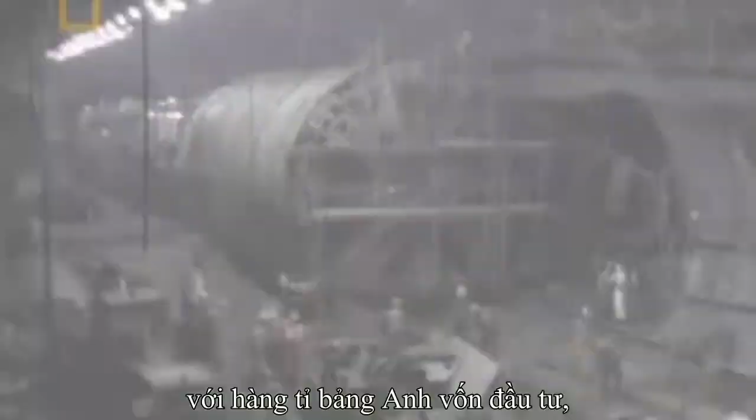Two countries divided by centuries of rivalry and warfare, and by 34 kilometers of treacherous open sea. It was a radical idea to dig a tunnel connecting them 100 meters below the rocky seabed. At stake, billions of pounds and the lives of 8,000 tunnellers. If it worked, it would be the world's longest undersea tunnel.

But with terrifying floods, a horrific fire, and financial meltdown, the Channel Tunnel would dice with disaster right from the start. This train is making an extraordinary journey that will take it under the surface of the Earth, through one of the world's biggest man-made structures. Engineers call it one of the 7 wonders of the modern world. The Channel Tunnel took 7 years to construct and devoured 1 million tons of concrete, enough to build the Empire State Building 3 times over.

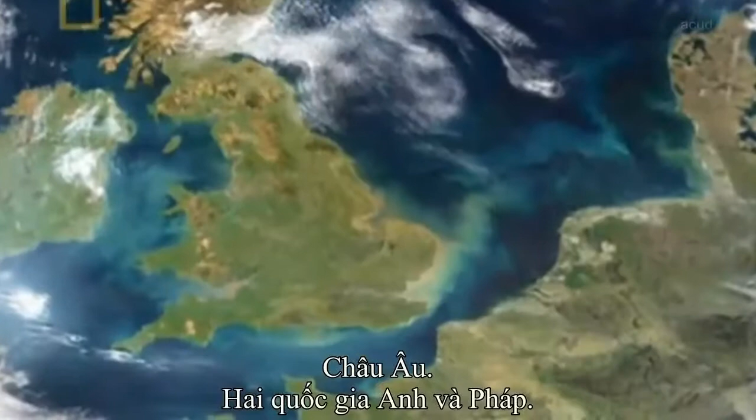Europe, the nations of Britain and France. Since Ice Age glaciers melted 13,000 years ago, they've been separated by this formidable body of water, the English Channel. At 34 kilometers across, it's twice as wide as the Grand Canyon. The two nations spent hundreds of years at war, right up to the last century. For many on both sides, it's still a love-hate relationship. So the idea of an undersea tunnel to link these one-time foes caused controversy. But the massive trade boost for both countries was an irresistible incentive.

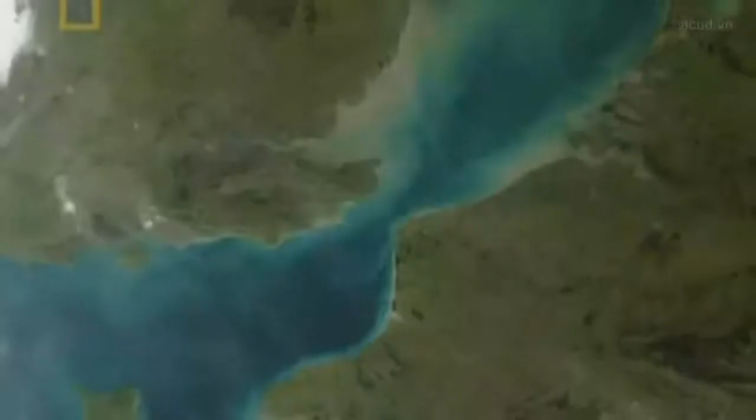In 1986, British Premier Thatcher and French Premier Mitterrand agreed to build the Channel Tunnel. But the total £3 billion budget was put up entirely by private finance. December 1987. The big dig begins. Heading underground were 2 armies of excavators, each over 4,000 strong, 1 French and 1 British. Each team would dig out from its own shoreline, racing to be the first to the midway point under the channel.

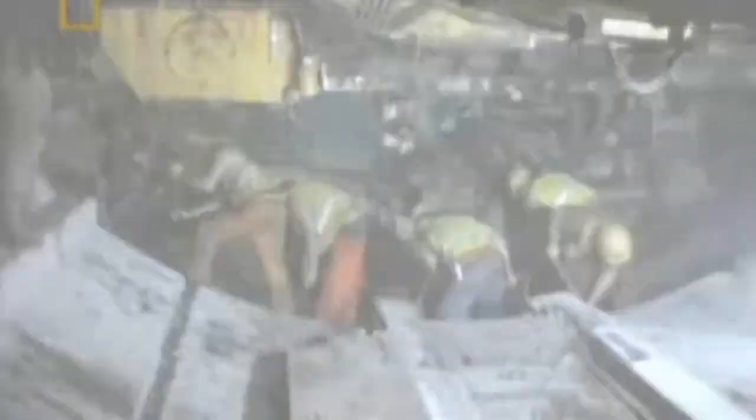The Brits were a tunnelling elite drawn from major worldwide underground projects. Calling themselves the Tunnel Tigers, they set great store by teamwork. One-man armies don't go very far. You know, it takes quite a few lads to keep something like this going. Commanding them is Chief Engineer Gordon Crichton. You had a team who were totally dedicated to building the job.

The French digging team were the underdogs, locally recruited and trained up for the project. It's the first time any of us have done a job like this. Everyone's proud to be involved. Leading the French troops was Laurent Leblanc. I couldn't believe I was actually working on such an exciting and colossal project. For me, it was absolutely incredible.

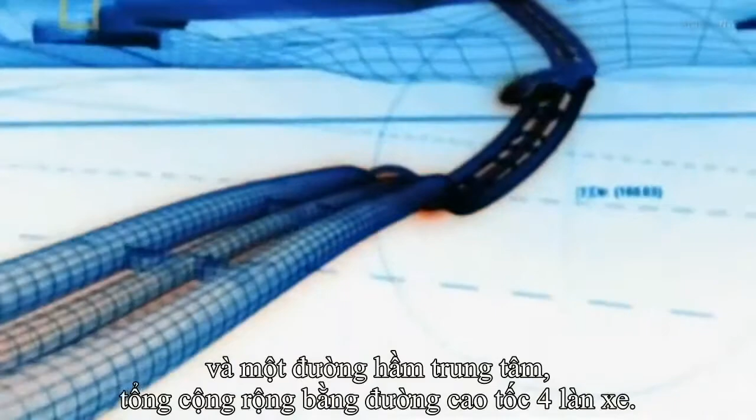The Channel Tunnel would run twice as long underwater as any previous tunnel. The task facing the teams was huge. They had to dig 2 main rail tunnels, plus a central service tunnel, together as wide as a 4-lane motorway. 245 cross passages, crucial escape routes in the nightmare scenario of a fire or accident in the tunnel. Above the tunnels, vents to release the huge air pressure from speeding trains. And giant crossover caverns, allowing trains to divert from one tunnel to the other to allow for maintenance. It all added up to a staggering 153 kilometers of tunnel to be dug.

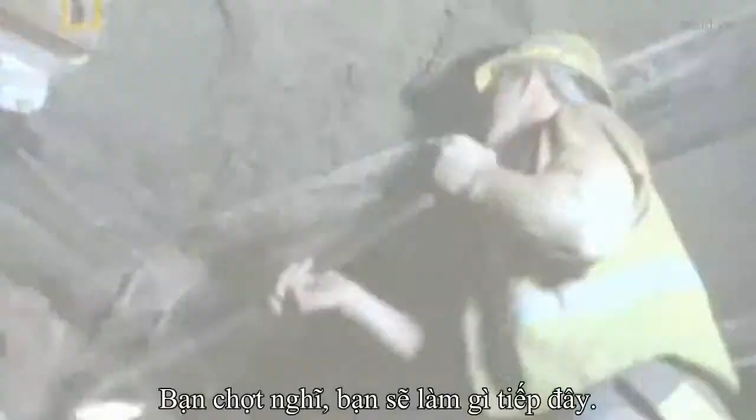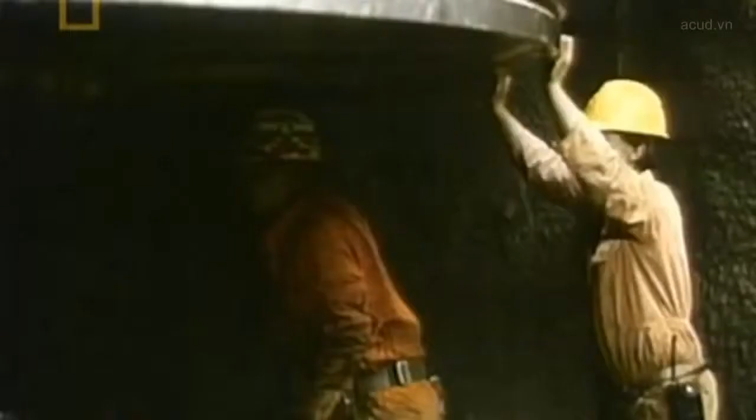As the dig began, the tunnellers were conscious of the vast scale and the real dangers of the task ahead. Above their heads, 100 metres of seawater and rocky seabed. Every day you wonder what you're going into. There's only one way in and one way out. Noisy, hot. You just think, what have I got myself in for, really? Ahead of these tunnelling foot soldiers stood a 17 million-ton wall of earth and rock. It's not a job for claustrophobics. The job would push the men to the limit, but it would also make big demands on the technology of the day.

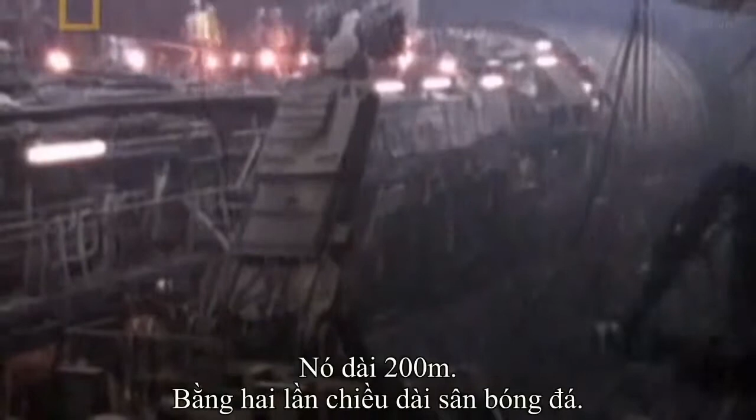Meet the tunnel boring machines. These underground leviathans spearheaded the Channel Tunnel dig. They were 200 metres long. That's the length of 2 football fields. They weighed 1,100 tonnes apiece, as much as a World War II destroyer. And they were twice as wide as a tank.

Yet, as Gordon Crichton reveals, the way that TBMs work is surprisingly simple. Imagine this is the bed of the channel. The machine is rotating underneath the sea, and as it rotates, the spoil from the tunnel is taken out the back, put into railway wagons and carried to the surface for disposal. Also, as it rotates, it erects a lining, a support round it, which is the permanent lining.

Expert tunneller Brendan Riley knew how central the TBMs were to the dig. Basically, the machine is a mini factory. The factory is provided with power, it's provided with water, it's provided with electric. It's a workshop of the machine, preventive repairs. Basically, it's self-contained. It's got everything. 12 French and British TBMs excavated the tunnels 24 hours a day, 7 days a week.

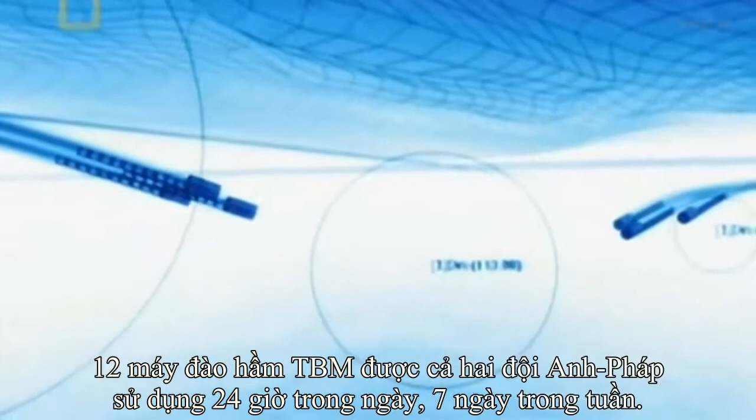The TBM's high-tensile forged steel blades carved out 10 tons of rock with every turn. The biggest machines cost £10 million each, but as they've been specially designed for this one job, at the end they would simply be scrapped.

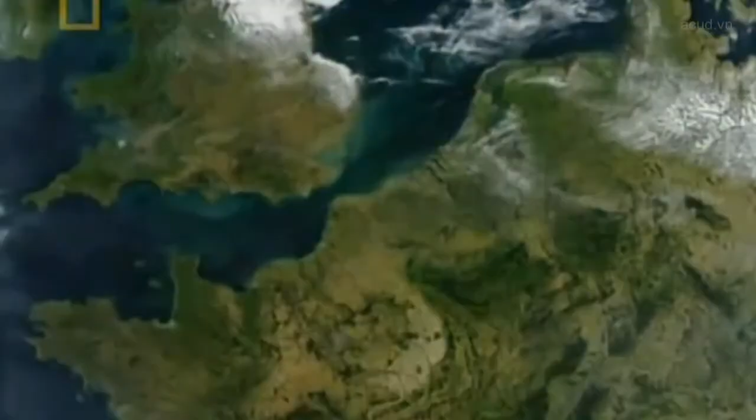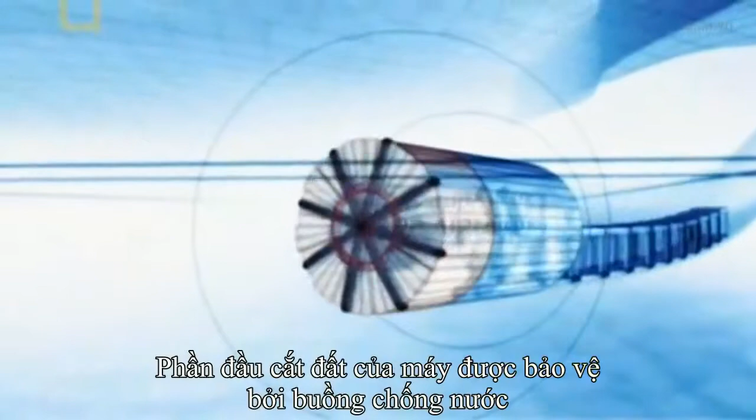The race between French and British tunnellers would be won or lost by their TBM's rate of progress. The Brits had the fastest machines, devouring up to 75 metres and 36,000 tonnes of rock a day. The French machines were 25% slower, but did have a key advantage. Their cutting heads were protected by a waterproof housing that allowed them to work on safely, even through waterlogged soil.

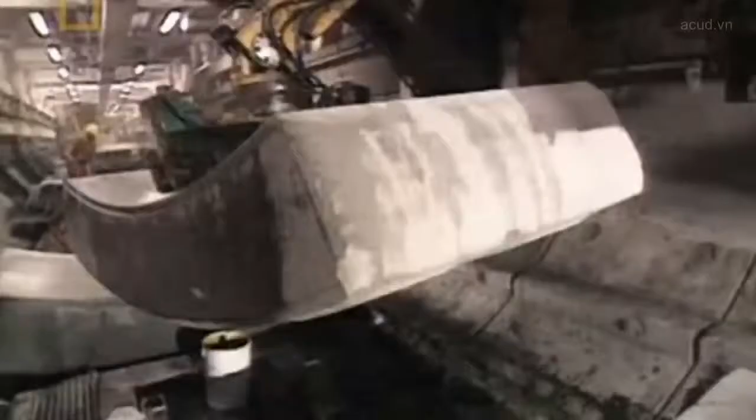1 month into the tunnel dig, with the ground staying dry, the speedier British TBMs began to get ahead. Every day, hundreds of concrete slabs were shipped in to line the tunnel roof as it was dug. They were as big as a family car and 3 times as heavy.

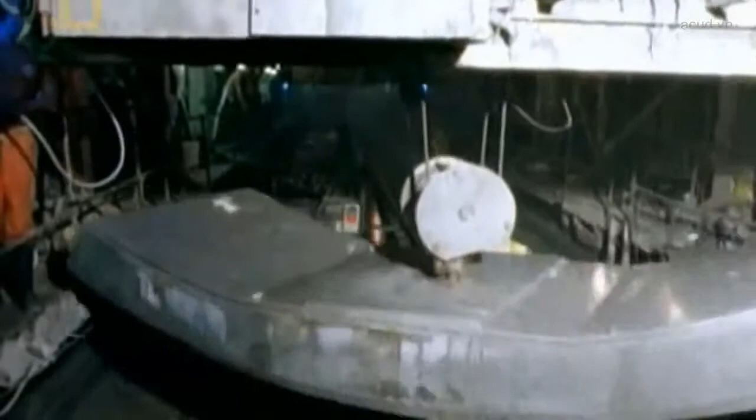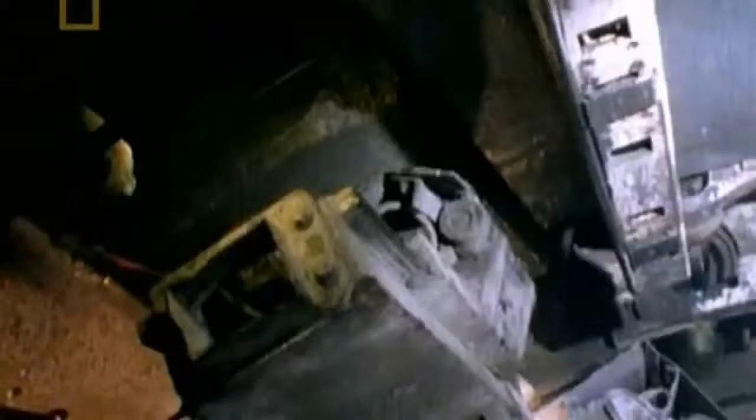This is no ordinary concrete. Specially made to a recipe using granite, it's stronger than the stuff they use to build nuclear reactors. The TBM's powerful hydraulic arms pushed the slabs into place, forming the tunnel wall. The TBMs had to be kept supplied with slabs and constantly moving forward.

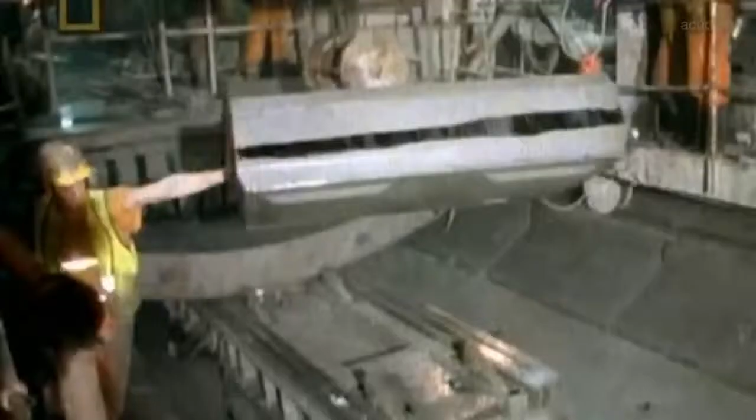British Chief Engineer Crichton knew that the schedule was tight. And with the tunnel's £1.3 billion budget all put up by private finance, government bailout was not an option. With the dig costing £1 million a day, each hour's overrun would add £40,000. By January 1987, the Anglo-French tunnelling race was hotting up. But the Brits were holding on to their lead.

The rivalry underground is keeping the dig on schedule, but speed isn't everything. Success relies on keeping both tunnels precisely on target. If they stray off course, lives could be at risk. It's enough to daunt the boldest of engineers. The Channel Tunnel Project, the longest undersea tunnel in the world.

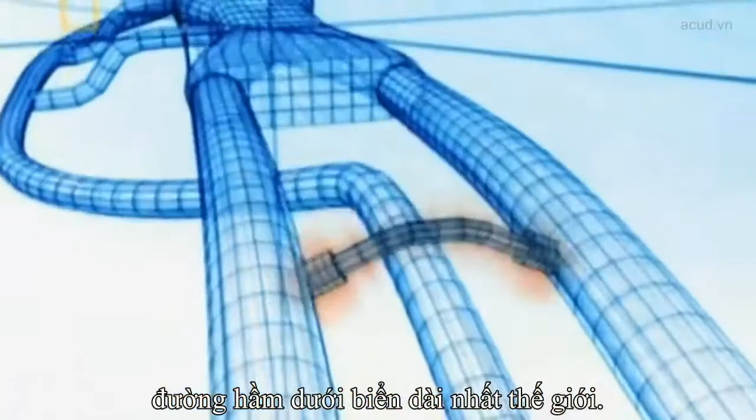Two rival teams of French and British workers were each digging out from their own shoreline. The plan, to meet midway under the English Channel. The tunnellers' goal was to win the race for the midpoint. But what kept the engineers awake at night was much more fundamental. The fear that the two tunnels wouldn't meet up.

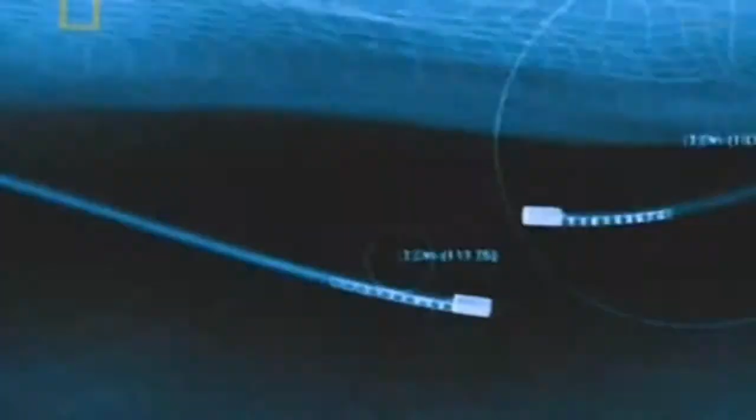If the two tunnels missed each other, that would mean last-minute course corrections, which could create sharp bends. And the high-speed trains that would use the tunnel had to have a broadly straight course to operate safely. The margin for error was frighteningly slim. The tunnels could not deviate by more than 2.5 meters. Being off target was not an option.

But lives were at stake too. If the massive tunnel-boring machines strayed off course, they could hit waterlogged ground. The result could be disastrous. Flooding, or worse, tunnel collapse. It was imperative that the TBMs were guided along a safe and accurate route. That meant conducting one of the world's longest and most in-depth underground surveys.

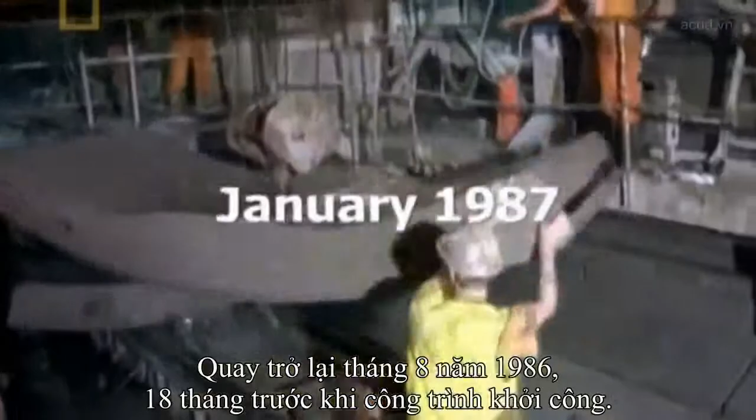Rewind to August 1986, 18 months before tunnelling began. When surveyor Eric Radcliffe took on the job of plotting the tunnel's course, he knew the scale of the challenge he faced. France you can see over there, that's the French coast. So we had all that way to drive the tunnel and keep it online for that 38 kilometres. Actually, from here it doesn't look too bad, but it's a long, long way.

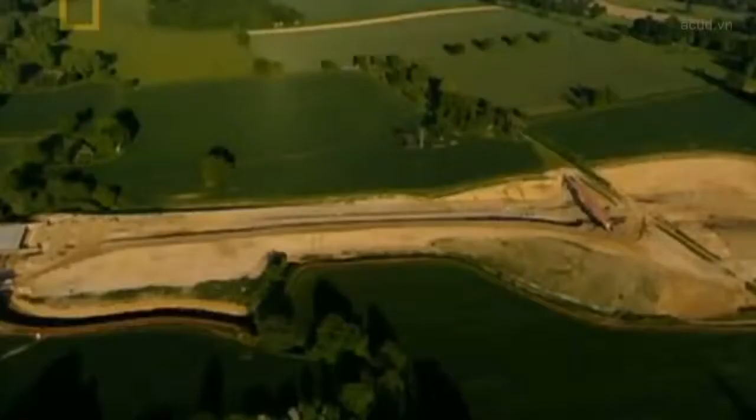Plotting an accurate course over such a long distance underground is a surveyor's nightmare. In tunnels, the normal rules of surveying don't apply. Surveyors normally work by measuring a series of angles at control points along the route. It's all a matter of geometry. Above ground, with 360-degree visibility, plotting a course is relatively simple.

Eric Radcliffe explains the difference. The whole road is opened to the air. All the survey control points from which you do the setting out are already established over the whole length. Underground, there are obvious complications. All the surveyors can see is a wall of rock. They can't see ahead to plot the course.

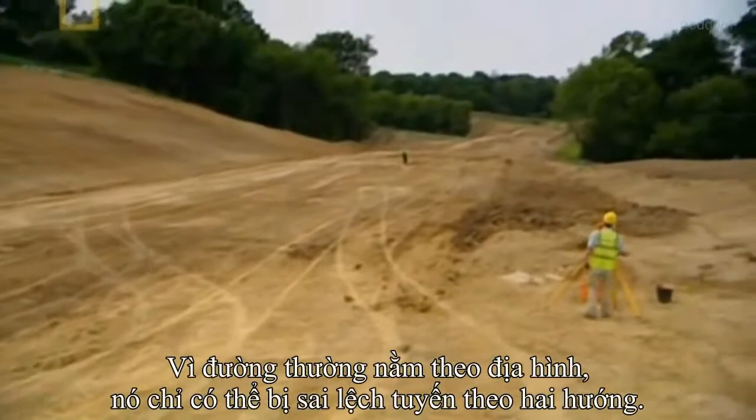Roads have one other plus point over tunnels. Because they're flat strips on the landscape, they can only go off course in two directions. Left or right.

A tunnel occupies a three-dimensional space underground. It can go off course not only left or right, but also up or down. The two halves of the Channel Tunnel had 4 potential ways to miss meeting up. It's like asking a golfer to sink a hole-in-one blindfolded from 38 kilometers. To keep the tunnel on course and on target, the surveyors had to use a secret weapon: geology.

Along its underground route, the tunnel would be driven through a layer cake of different soil and rock types with very different consistencies. The geologists needed one stratum that went right across the channel. This stratum would provide a trail to help keep the British and the French tunnellers on course. But it must be exactly the right type of rock for tunnelling.

Jean-Luc Dessein was one of the geophysicists charged with tracing the perfect stratum for the tunnel to follow. On the French side of the channel, Dessein began his search. It would have to be waterproof to resist flooding, and compact enough so it wouldn't collapse during the dig. In these cliffs, Dessein found his prize. Water poured over this seam of rock without soaking in, evidence that it was waterproof. The soft rock, impervious, so no water in the tunnel. This is a perfect situation for boring a tunnel. It's called blue chalk.

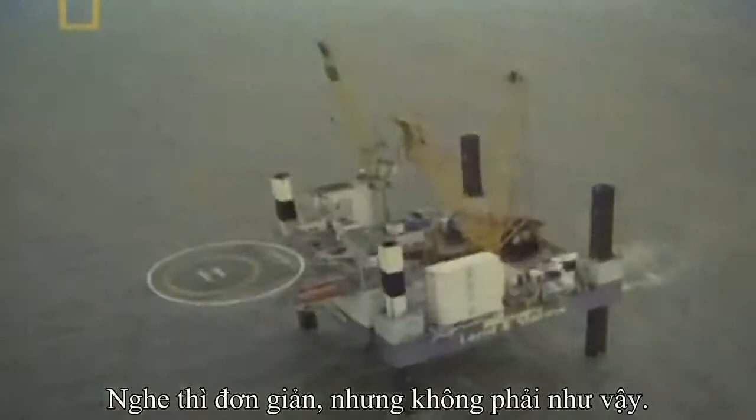But it was one thing to identify the ideal rock, another to discover its course. Geologists drilled a series of boreholes into the seabed and dropped probes that fired sound waves deep underground. The aim, to measure changes of speed in the sound waves as they passed through different rock and soil layers. It sounds straightforward, but it wasn't. Tracing the course of the blue chalk meant sinking 12 of these boreholes right across the channel, a tricky task in one of the world's busiest sea lanes.

You have a high traffic of vessels. You have tide, you have waves, so it's a difficult place for making accurate investigations. The geologists concluded the blue chalk would provide a feasible route across the channel. If they were wrong and the TBMs left the waterproof strata, they could hit waterlogged ground, with devastating consequences, flooding or even tunnel collapse.

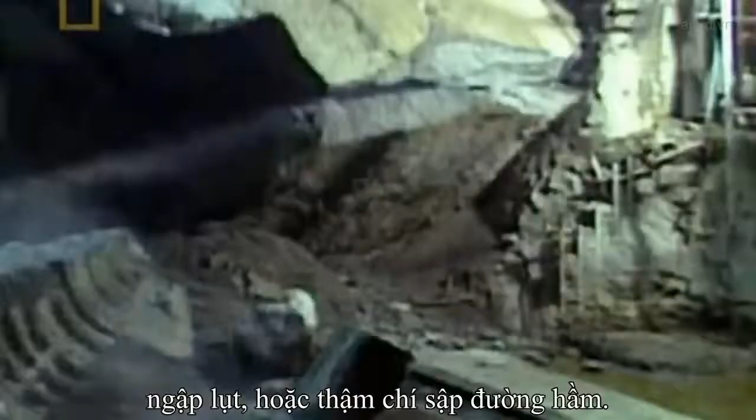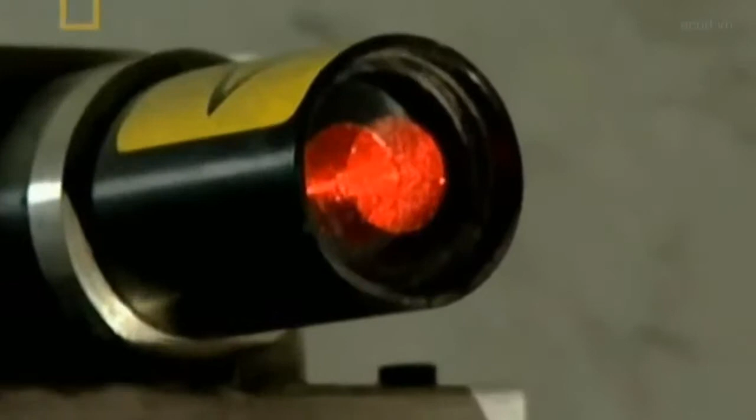Spring 1988, 3 months into the Channel Tunnel dig. The tunnellers were gouging their way through the rock deeper and deeper underground. Standing between the tunnellers and the risk of flood was the TBM's laser guidance system. Laser guidance is commonly used to keep above-ground structures like roads on course, but underground it had to be used in a more imaginative way. Instead of looking ahead to see where they were going, the tunnellers looked back to where they'd been. Laser beams continually scanned backwards to the tunnel's start point to compare it with the TBM's changing location. Computers then checked this data against the surveyor's course coordinates.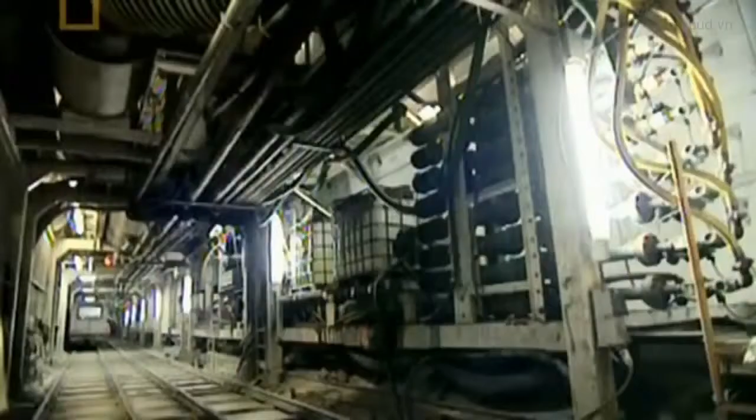For tunneller Brendan Riley, the laser guidance system was one of the TBM's most impressive features. As the machine moves forward, the laser monitors the change in movement to say whether the machine is moving left or right or up or down. With that information fed back into the computer, it compares that information with where the TBM should be at that known point in time and gives that information back to the driver to say whether he needs to steer up or steer right.

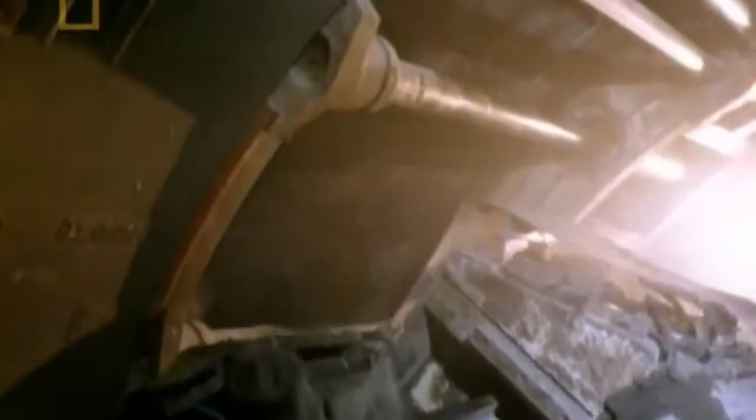As the tunnel face moved further from dry land, conditions for the men got worse. Engineering manager Ian Fugeman recalls the scene. Anybody going to work had to travel in a cramped train up to 22 kilometres out to the place of work. By the end of the dig, the workers' trains had clocked up enough miles to go to the moon and back 4 times.

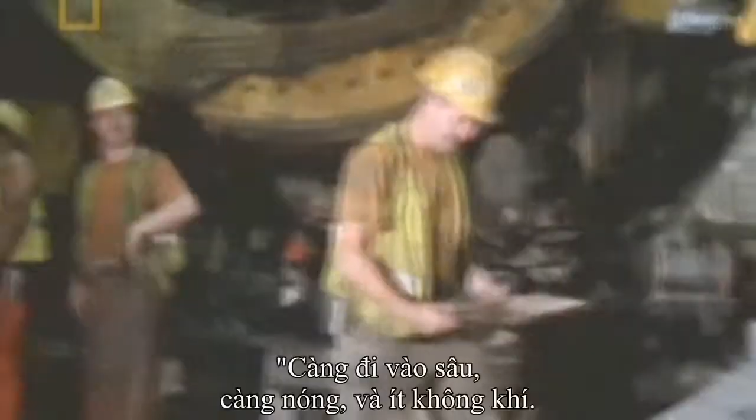This far underground, keeping the air fresh is a major challenge. A massive ventilation system pumped air to the tunnel face. But the men still faced the risk of encountering toxic gases. The further in you are, the warmer it gets, the less air. We carried respirators with us. If there was an accident, we'd have enough air to breathe with.

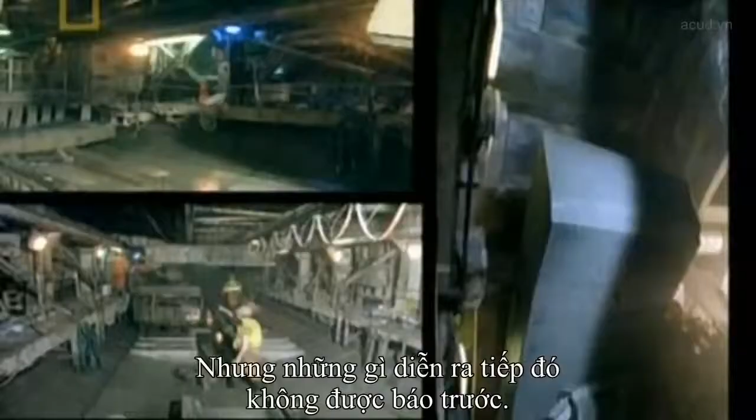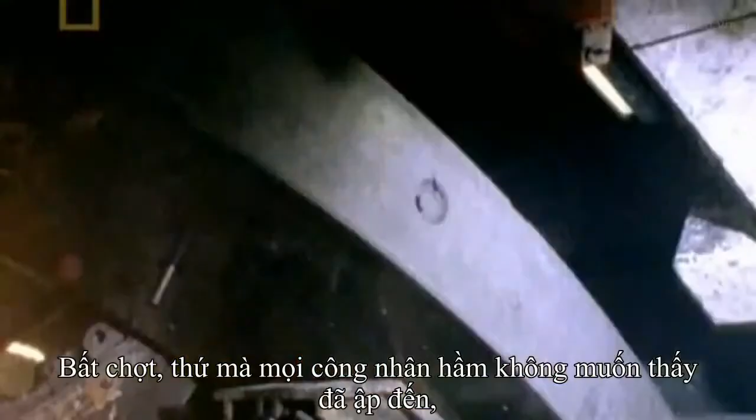But Chief Engineers Gordon Crighton and Laurent Leblanc, the frontline commanders of the tunnel dig, were starting to breathe easier. The schedule was holding up, and so was the layer of blue chalk. But what happened next came without warning. March 1988. The service tunnel on the British side. Suddenly, what no undersea tunneller ever wants to see. Water. Thousands of gallons of it flooding into the tunnel. Work comes to a halt.

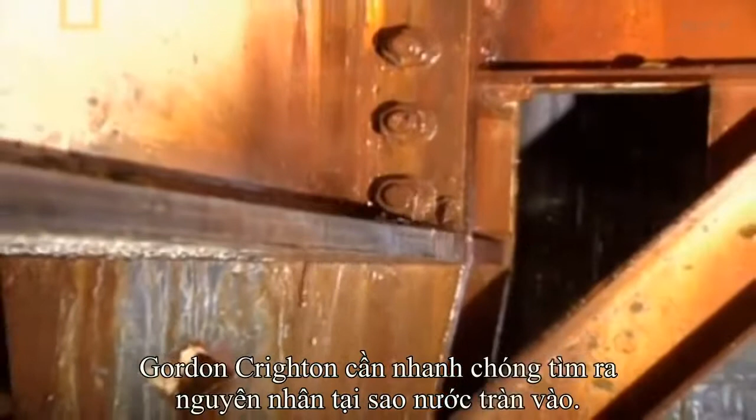Cause panic. Oh, we have to stop straight away because you don't know exactly what you're going into. But Gordon Crighton must act fast to find out where the water is coming from. Is this just a random pocket of fresh water? Or is the sea itself breaking through? He tastes the water, and it's salty. We knew we had a path right to the channel itself. We knew it was serious.

It's disastrous news. What's coming into the tunnel is seawater. The men know that above their heads there's 3,000 billion tons of it. The pressure on the seafloor 50 meters above is enough to crush a car like a beer can. Now, in places, the water starts to burst through with the force of a fire hose, 300 litres a minute.

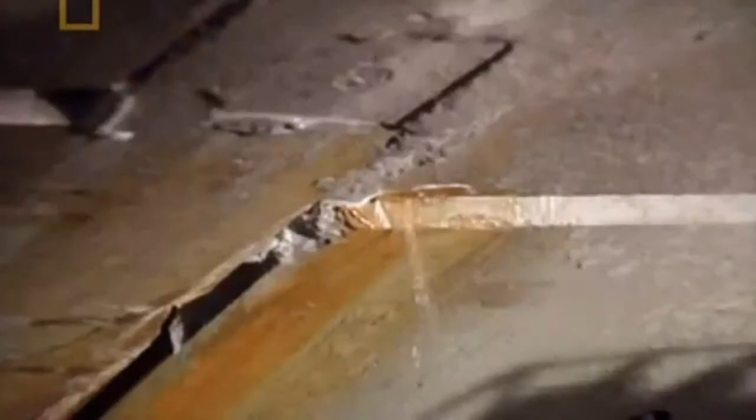Then, a crack appears in the tunnel roof. Rocks start to fall. The water is pouring through fissures and loosening lumps of the tunnel roof. The British tunnellers might just be on the edge of disaster. If the cracks worsen, they might let in enough water to weaken the tunnel. Ultimately, it might even lead to the tunnellers' biggest fear: collapse. Chief Engineer Crighton must find a way to plug the leaks, or they could face catastrophe.

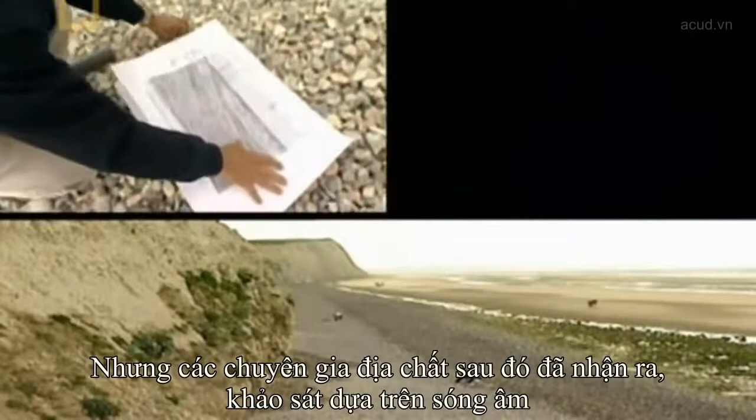But how could this be happening? An 18-month survey identified the special layer of rock called blue chalk that was meant to be waterproof. But the geologists are quick to point out that surveys based on sound waves can reveal the course of a rock layer, but they can't give a definitive picture of the rock's quality. Now it turns out that the stratum of rock the tunnel is driving through is fractured, riddled with fault lines and cracks, something the surveyors could not have foreseen.

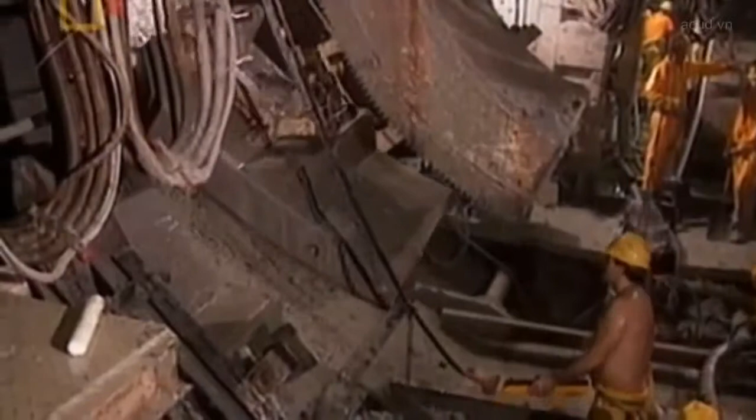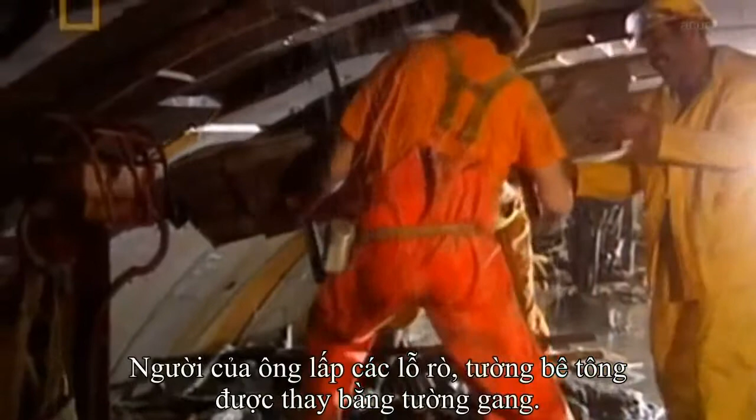Back in the British tunnel, Engineer Crichton averts disaster. The men plug the leaks and concrete liners are replaced by stronger cast iron versions. Crisis over for now. The tunnel tigers start to inch forward again. But the fractured ground stretched on, and the atmosphere was edgy. Every ring that you cut, you were just hoping that it was going to be good ground that was there. But there were more delays as the leaks short-circuited the TBM's electrics. The clock was ticking. With every day, the costs were mounting. And the overspend was running into ten million.

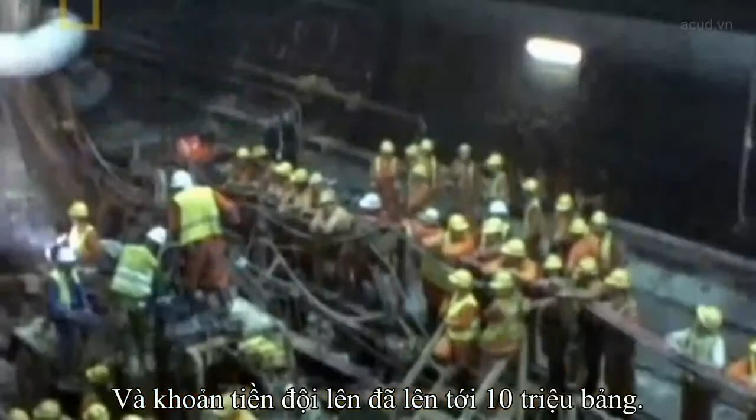The French side, meanwhile, had also hit water. We did indeed hit water. That made the job more difficult. A lot of water always makes the work harder. But the French had been forewarned about fractured rock on their side. Features in the geology made it much simpler to analyse. Now the French decision to opt for waterproof tunnel boring machines finally started to pay off. Slower than the British TBMs so far, they now gave the French a serious edge. We decided to use tunnel boring machines that were totally enclosed, totally watertight. These could resist any level of water leakage, no matter how severe.

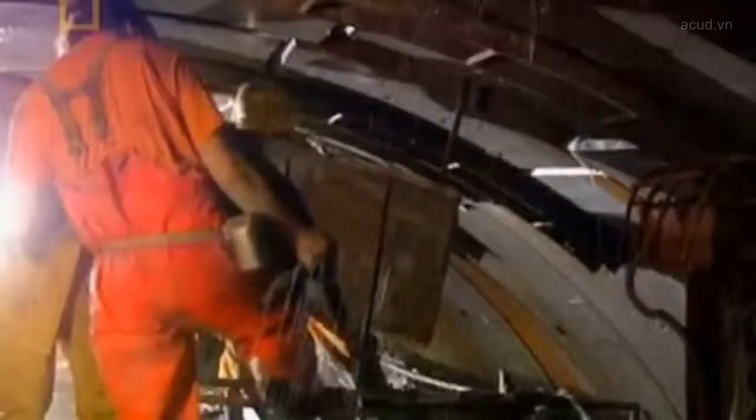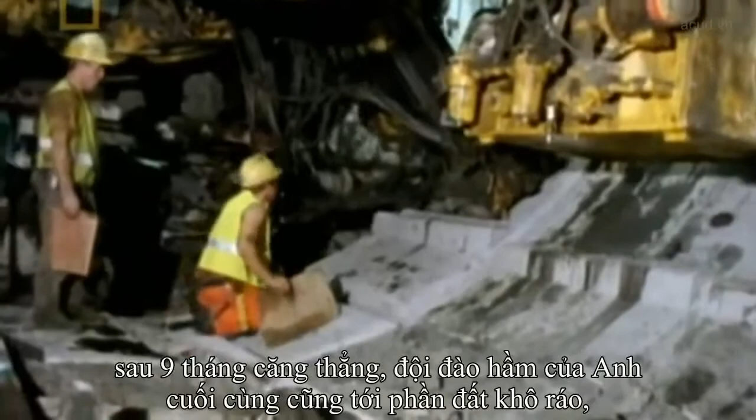Meanwhile, the Brits slogged through the leaks and falling rocks and prayed for better ground. Workers rigged a form of makeshift armour plating on their TBM and pressed on. January 1989. After a tortuous 9 months, the British team finally hit drier ground. Massively behind, the pressure to catch up was now intense. Everybody worked long hours. We had to do it to the time, we had to do it to the programme. But at last, the Tigers were smiling. The ground conditions came right, everything seemed to fall in place, and then we started taking off.

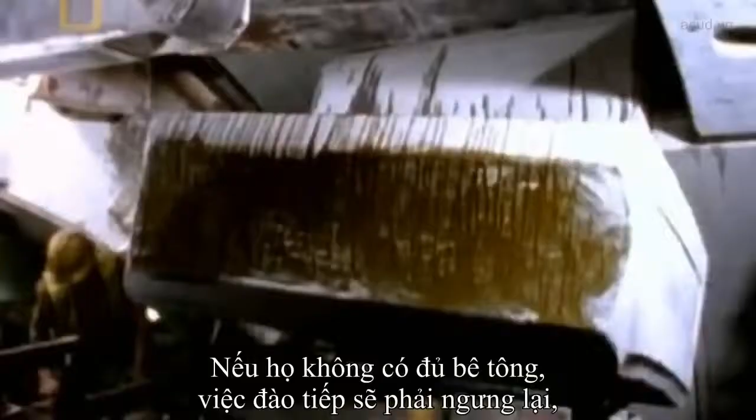The British tunnellers fought their way back into the race. We've done over 400 metres quite a few times in a week, and I personally think we could have done the half kilometre. But success came with a sting. The British progress started to stretch the supply of lining slabs. If the slabs ran out, their dig would grind to a halt, with a multi-million-pound meter ticking.

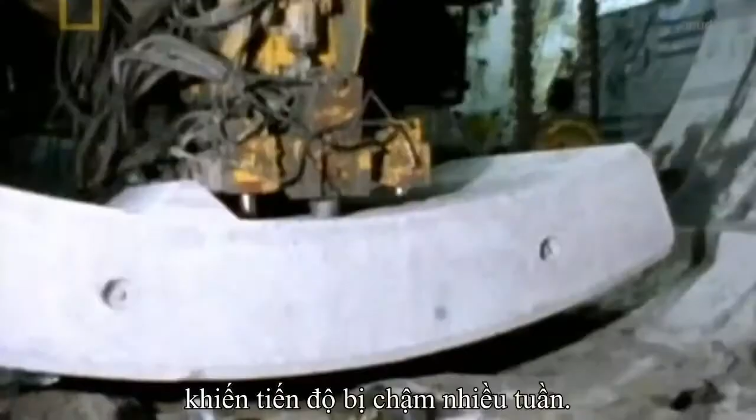January 1990. The French and British tunnelling teams were 2 years into digging the record-breaking Channel Tunnel. The competition between the two countries was fierce as they dug out from their coastlines. If all went to plan, the tunnels would meet up some 18 kilometres out, midway under the English Channel. Flood and rockfalls on the British side nearly spelt disaster and set progress back weeks. But now the Brits were catching up again, and the race for the halfway point was back on with a vengeance. But there's more to building a tunnel than high-speed digging.

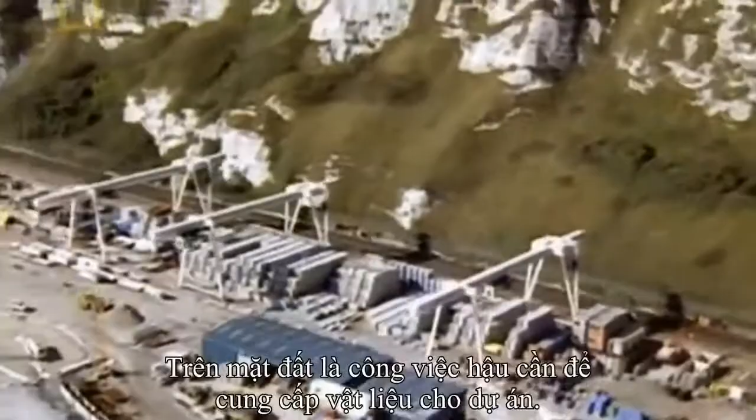Above ground, a huge round-the-clock operation kept the project fed with vital supplies. And the most crucial ingredient of all, concrete. Each slab weighs as much as a pickup truck. The French and the British together need 750,000 of them to line the tunnel. In Britain, special trains carrying 4,500 tons of slabs, enough to construct 100 average houses, speed back and forth to the coast. But the British team was about to hit another problem.

The flat French shoreline provided plenty of room to store slabs close to their tunnel mouth. But 50-metre cliffs on the British side hugely restricted storage space. And as their tunnelling rate increased, space got tighter and tighter. If it ran out altogether, the supply chain would slow, the dig falter, and the mounting overspend could spin out of control. The British TBMs were munching their way through the tunnel, but without slabs to line the roof, they would soon grind to an expensive halt.

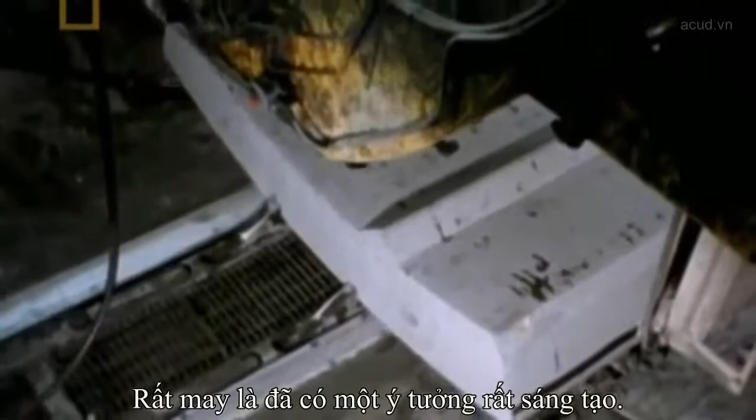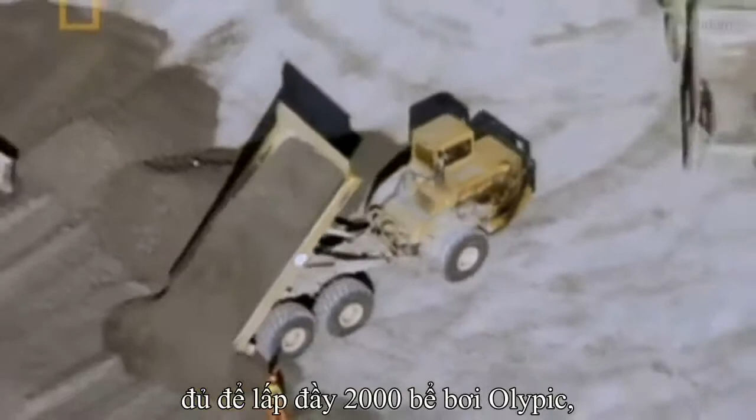Luckily, somebody had a brainwave. Every day the TBMs produced up to 36,000 tons of unwanted rock and earth known as spoil. Why not use it to solve the storage problem? The spoil could be deployed to extend Britain's coastline out to sea, providing desperately needed space. It was an audacious plan. 17 million tons of spoil, enough to fill over 2,000 Olympic swimming pools, were dumped into the sea. The storage problem was solved, and Britain grew by 90 acres. That's the area of 68 football pitches.

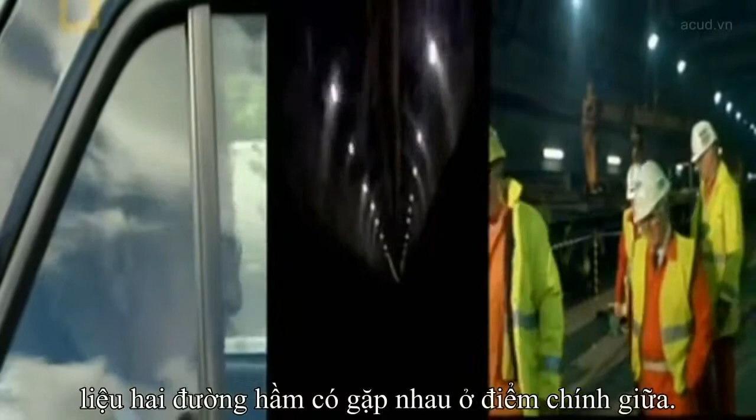Underground, the moment of truth was approaching as the French and British tunnellers edged ever closer together, towards breakthrough point. The tunnellers were intent on reaching the middle first. The engineers had bigger worries. After 3 years and 37 kilometres of tunnel dug, would the two halves actually meet in the middle? The British reach what they think is the rendezvous point first, but are they anywhere near the French?

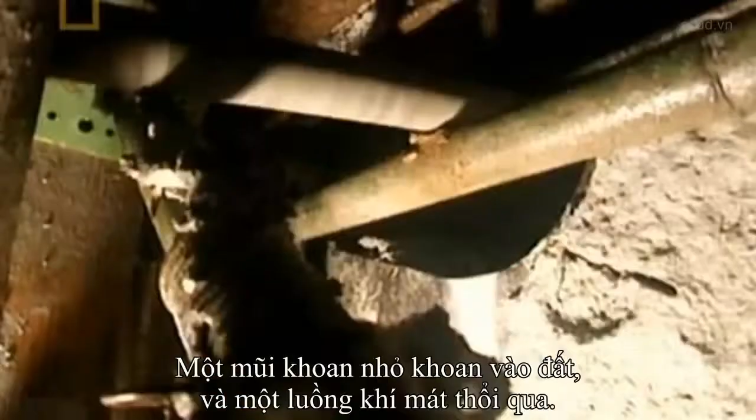As a small drill bites through the soil, a current of fresh air wafts through. Air from France. French and British workers raced to punch through the last few centimetres of rock that have separated the two nations since the Ice Age. And then, an epoch-making moment. They're through! They're through! They're through! Hey!

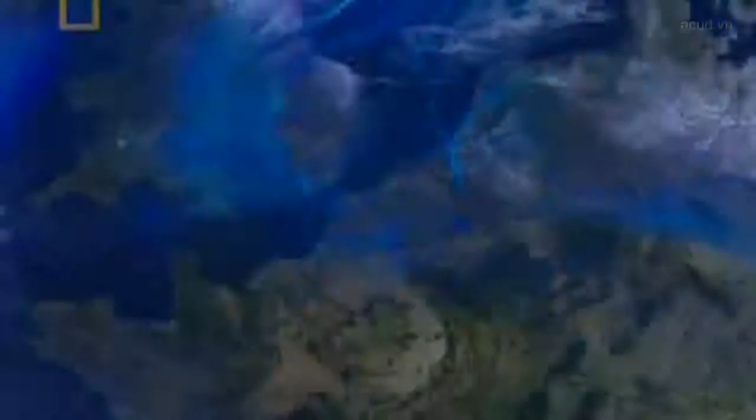And the surveyors were vindicated. The tunnels didn't just meet, they met a minuscule 35 centimetres off target, the width of a portable TV screen. No one had ever done it before, over 38 kilometres. From a surveyor's point of view, that is a unique achievement. The Tunnel Tigers basked in their achievement. I think it's great. We're getting past halfway, so I suppose in a way we beat the French. So the British won the tunnelling race. But if the French had got to the RV point first, there would have been a wait while the Brits scrambled to catch up.

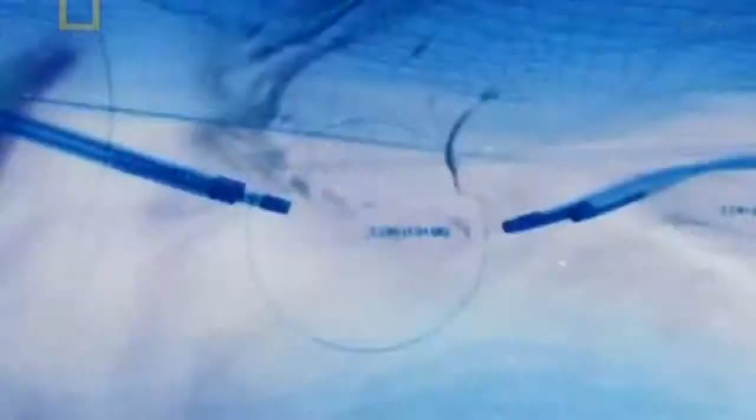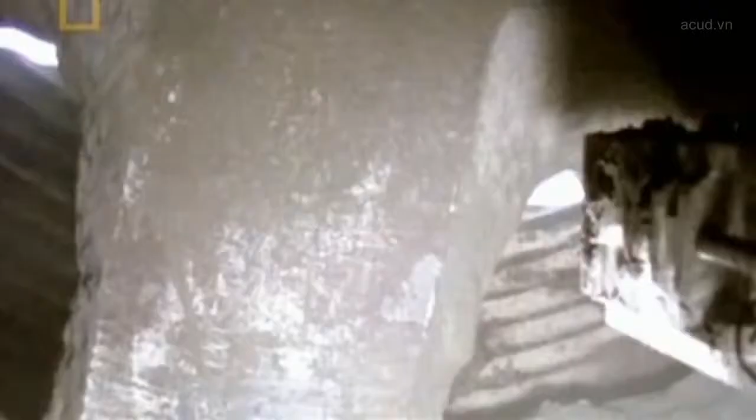Here's why. Job done, the TBM's only value was as scrap. But two machines were stuck head-to-head in a monster gridlock. One side's machine had to go. But what do you do with an 1,100-ton TBM that's past its use-by date? Bury it. It was agreed that the British TBM would dive below its French counterpart to be entombed forever, 100 metres below the surface of the channel. As man and machine were parted after 3 years, it was a poignant moment for the Tunnel Tigers. You see the machines buried and you get a bit of a twinge, you know. The French TBM was towed to Britain to be scrapped, so the Brits made the first breakthrough, but a French vehicle took the first trip under the channel.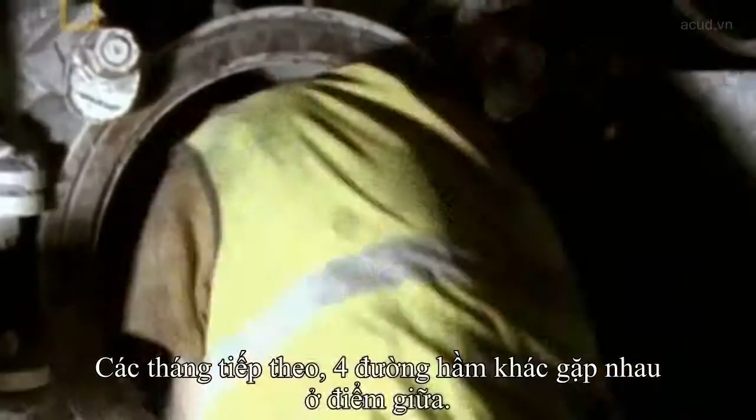Over the following months, the 4 other main tunnels met up in a flurry of breakthroughs. The tunnellers carved out hundreds of linking cross passages every few hundred metres. They drilled out the air pressure shafts. They finished off the crossover caverns. May 1991, the Channel Tunnel was finally dug. The most important thing is that you can stand behind us and look straight through, and that's it. For the French too, there was a tremendous sense of the significance of the moment. It's an historic moment. Napoleon tried to build a tunnel but failed. Now we have one Europe.

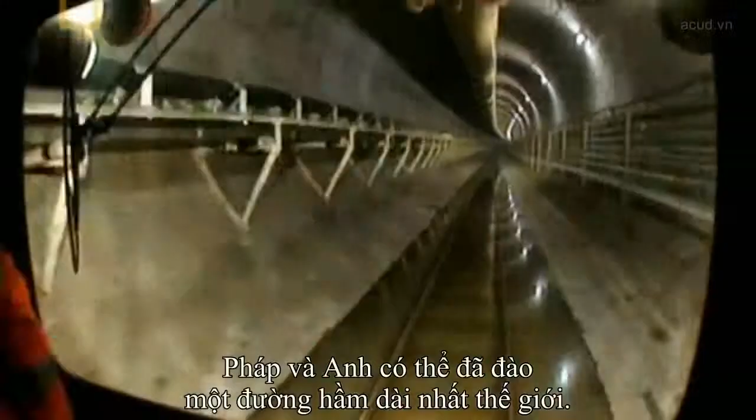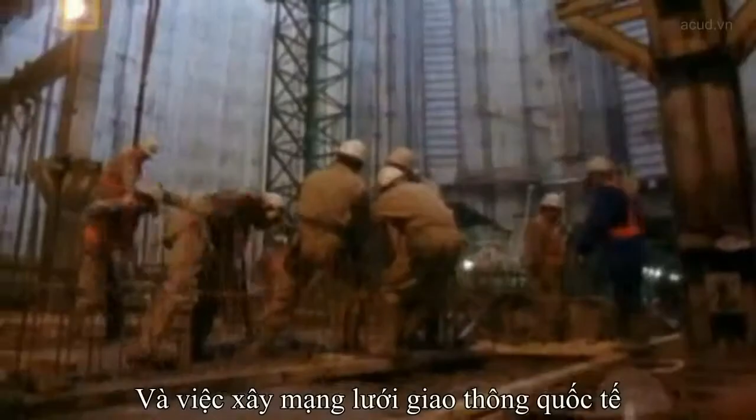But behind the scenes of celebration, there was one group who weren't quite so jubilant, the tunnel's financial backers. The French and British might have dug the world's longest undersea tunnel, but delays saw the budget soar from 1.3 billion to over £2 billion. And the job of building the international transport network serving the tunnel had only just begun.

As the tunnellers headed home, another army of workers took over. They would build 2 huge terminals on either side of the channel, lay 195 kilometres of railway track, and to extract the heat generated by high-speed trains, fit a giant cooling system equal to 250,000 domestic fridges. They would also build new trains designed to carry cars, trucks and people through the tunnel.

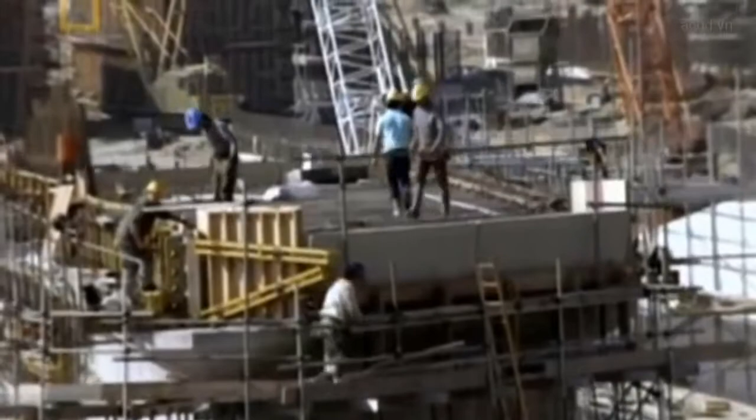But if the tunnel's investors had any hopes that Phase 2 of the project would come in on time or budget, they were in for a big disappointment. 2 years later, overruns had driven the spend higher than ever. The terminals, the track, the trains, they all bust the budget. May the 6th, 1994, the Queen and French President Mitterrand opened the Channel Tunnel. A year late.

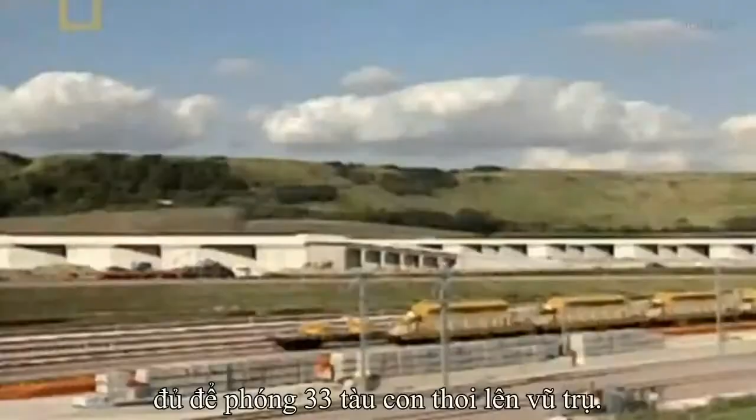Delays and interest charges had racked the total cost up to £10 billion, enough to launch 33 space shuttles. Financial institutions of many countries collaborated to finance this, the biggest privately funded construction project ever undertaken. But business wasn't booming. At first, the tunnel trains could only take trucks. It was 6 months before the tunnel could handle cars and passengers.

A cross-channel trip by ferry from Britain to France takes an hour and a quarter. Using the tunnel slashed the journey to just 35 minutes. But take-up was low. Some speculated that people were fearful of being underground if there should be a disaster. Meanwhile, high interest rates and massive competition from ferries and airlines dragged the tunnel even deeper into debt. And then, just when things seemed at rock bottom, everyone's worst fears were realized.

By 1996, the Channel Tunnel has been open for over a year, but business is poor, and the tunnel is about to face its darkest hour. November the 18th. Sangatte, on the French side of the Channel Tunnel. 9:48 p.m. Freight train number 7539 approaches the tunnel, bound for England. On board, a deadly cargo. A truck has caught fire and is gushing smoke and flame. Railside workers had spotted the blaze and immediately reported it, but the train is already several kilometres in, under the sea.

One of the 31 passengers on board is British truck driver Brian Shilton. And all of a sudden we started to see this black, jet black smoke rising, coming in from the floor of the carriage. The truck drivers are riding in a passenger coach behind the engine. The fire starts 400 metres away, but it's getting closer.

Bill Welsh of the Kent Fire Brigade will later that night find himself face to face with the Channel Tunnel fire. We were talking about the most severe fire you can ever imagine. It really was like looking into a furnace, if you can imagine what that's like. Welsh's first concern, how to rescue the passengers. There's no way out. It's not like you're in a house, you can get out the doors, the windows. When you're in a tunnel, you're relying on someone coming to rescue you.

At 9:51 p.m., the Fire Control Centre advises the driver to keep going. Speed helps suppress the flames, and the train is only 15 minutes from the other side. US fire expert Ed Comeau will later help British and French investigators sift through the charred wreckage of the train. Part of the standard operating procedures is to allow the train to continue through and emerge on the other side where they would fight the fire and suppress it. The train accelerates deeper into the tunnel, racing for the English coast.

The train is 19 kilometres into the tunnel, but safety lies just a few metres away in the service tunnel. To reach it, the passengers must find one of the cross passages in the main tunnel walls. But the smoke is too thick to see the way out. The driver and the crew could not see where the door was. They couldn't see the safety lights. So they were stuck there. They were waiting for someone to come and open that door and help them.

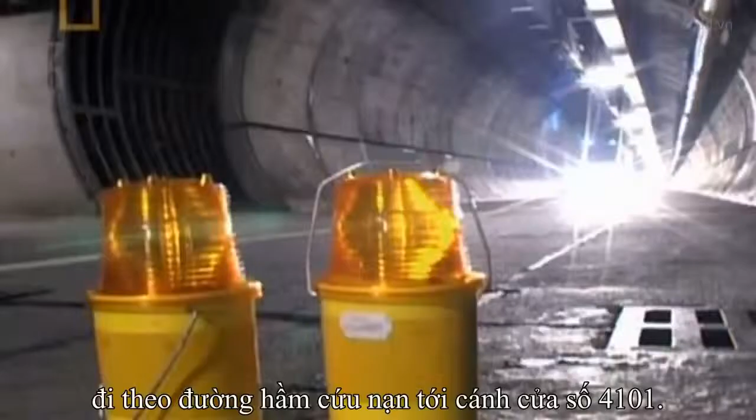10:02 p.m. Using fire sensors, controllers identify a hotspot in the main tunnel that they think must be the train. They open the nearest cross-passage door remotely. The controllers now direct French firefighters into the central service tunnel to cross-passage door number 4101. It's the one they think is nearest to the passenger coach. It's a 15-minute journey, and for the stranded passengers, time is running out.

In the tunnel, trucks are now exploding. Tyres on the lorries all blowing. The train was just rocking from side to side on the track, and that was actually happening while we was lying on the floor. The temperature climbs. At its peak, it will reach 1,000 degrees centigrade. So hot, the train's steel wheels are welded to the rails, and the concrete lining of the tunnel itself becomes dangerously unstable. It's where the moisture within the concrete expands and then explodes out with terrific force. Very much, I would imagine, like shrapnel in a war situation.

10:20 p.m. Firefighters arrive at cross-passage door 4101. But to their horror, there's no train. It's the wrong door. The chances of saving the passengers are receding fast. Fire is raging through a train halted 19 kilometres into the Channel Tunnel. In choking smoke, 31 passengers await rescue. The flames are just 200 metres away and closing fast. But firefighters have gone to the wrong section of the tunnel.

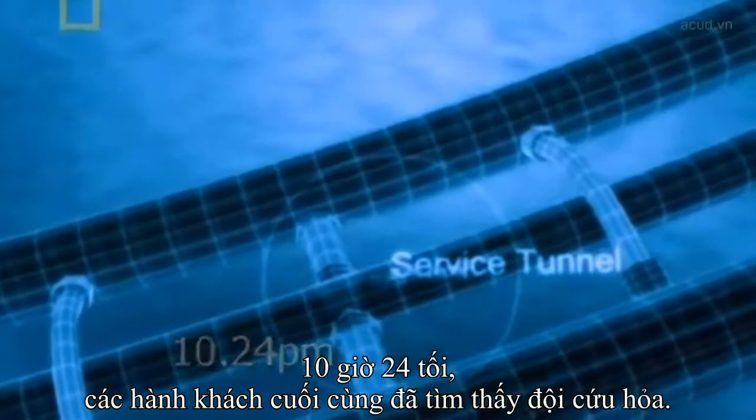At 10:24 p.m., the passengers finally find the firefighters. It's 40 minutes since the fire was reported. We was just very, very lucky on that night to be alive today. No lives were lost, but it was a grim reminder of the perils of an emergency so far underground. One or two of them were near to collapse. They'd endured 20 minutes of having to breathe in acrid smoke, and it was very fortunate that we didn't lose any lives. But the system worked. The system worked.

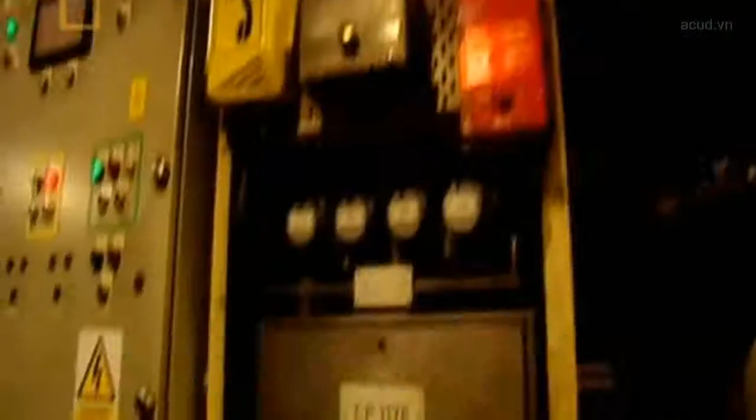After the fire, an urgent safety review. It results in improved fire sensors, better emergency lighting, and promises a quicker future response from firefighters. The tunnel was repaired and reopened in just 2 weeks, but the damage to its image would take longer to overcome.

1999, the last year of the century, the last year of the millennium. At last, a good year for the Channel Tunnel. More than 5 million cars and trucks travelled on the underground rail link between the British and French coasts. Nearly 7 million people use the passenger service that links London, Paris and the Belgian capital, Brussels. 10 years on, and nearly 150 million people have travelled through the tunnel. That's more than twice the UK's population.

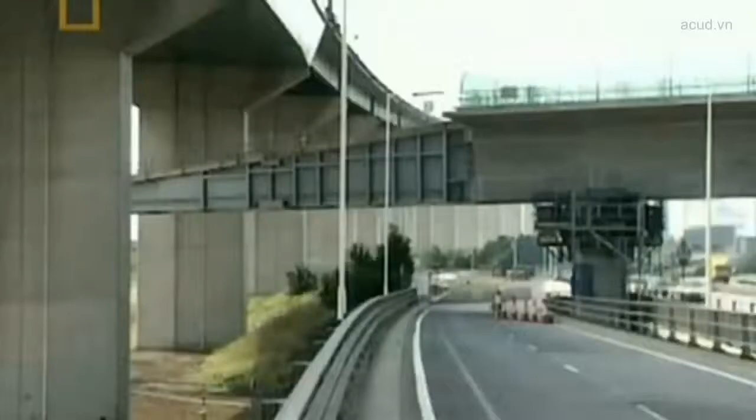Now, Britain and France are to be brought even closer via a new high-speed rail link from London to the tunnel entrance. Trains reaching 300 kilometres per hour will speed passengers to Paris in 2 hours 15 minutes, half the journey time of the pre-tunnel era. So far, the line's on budget and on schedule. It will complete a vast pan-European transport network. At its heart, the Channel Tunnel itself.

11 men lost their lives while building the Channel Tunnel. For British Chief Engineer Gordon Crichton, the tunnel stands as a permanent testament to them and to all those who built it. People were proud to work on it, and I really think that's what saw it through at the end. For Crichton's opposite number, Laurent Leblanc, the tunnel represents a personal best. For me, it's a great memory, the experience of my life without a doubt.

An undersea tunnel to unite two nations with such an ambivalent relationship seemed an eccentric plan. But the Channel Tunnel has overcome scepticism, grappled with a debt mountain, and endured fire and flood. It's become one of the engineering wonders of the modern world and changed the shape of Europe forever.